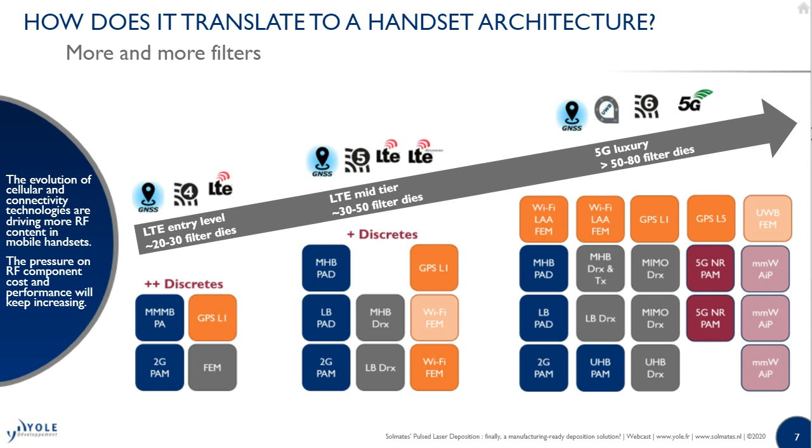And with that, there is a problem of cost performance equation, as there are more and more filters to pack in a handset, but there is less space to pack the filters. A lot of innovation is required to improve the form factor of the filters. Also, the cost of the filters is important. So it leads to innovation in packaging. There is also a big pressure for yield improvement. And there is a trend toward multiple filter aggregation in a single die. Also carrier aggregation pressure that leads to more quadplexers, hexaplexers, and so on, so n-plexers. More complex filters are coming over time.

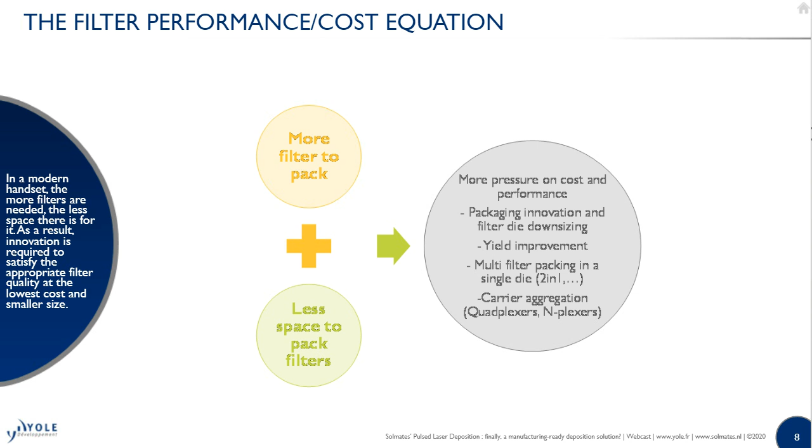To build these filters, there is a variety of technologies that can address the multiple bands of frequency to be addressed, and also the multiple bandwidth requirements. To just name the different technologies, we are talking there acoustic wave technologies. There is the well-known legacy technology, which is SAW, surface acoustic wave technology. On top of that, there is the temperature compensated SAW, which is kind of an improved technology enabling a good behavior when the temperature of the device is changing.

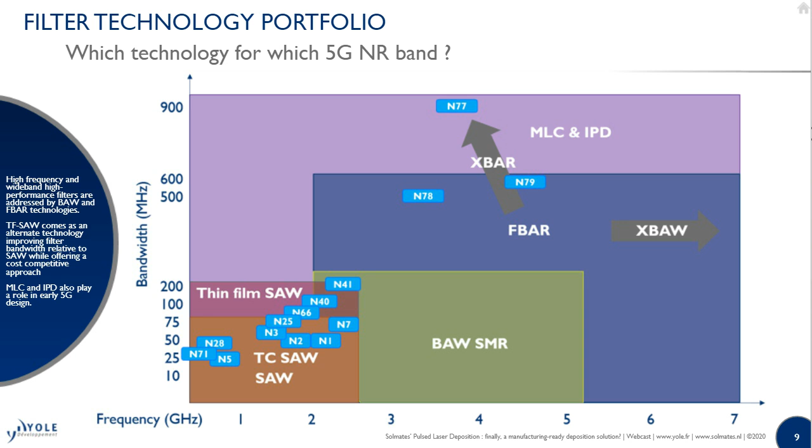There is also a new type of technologies that are emerging, which we call thin film surface acoustic waves. Basic idea is the film of the piezo layer is thin compared to the SAW technology. It's not a bulk acoustic wave. Then after, there is the bulk acoustic wave technology. There are multiple flavors of it. One is the BAW-SMR, solid mounted resonator, and the FBAR technology, which is the membrane built on top of a silicon substrate. And to complement the filter technology portfolio, there is also multi-layer ceramics and IPD type of filters that can address several bands.

Looking at the technology landscape, each technology has players that have developed their own IP and products. And if we go to the high-performance filters, such as the temperature compensated SAW or thin film SAW, also the BAW-SMR and FBAR filters, there is not a big list of players that can play into those type of high-end filters. And it's interesting to see that all of these bricks have been developed by these players to have a complete portfolio of technology and address the multiple needs of the market.

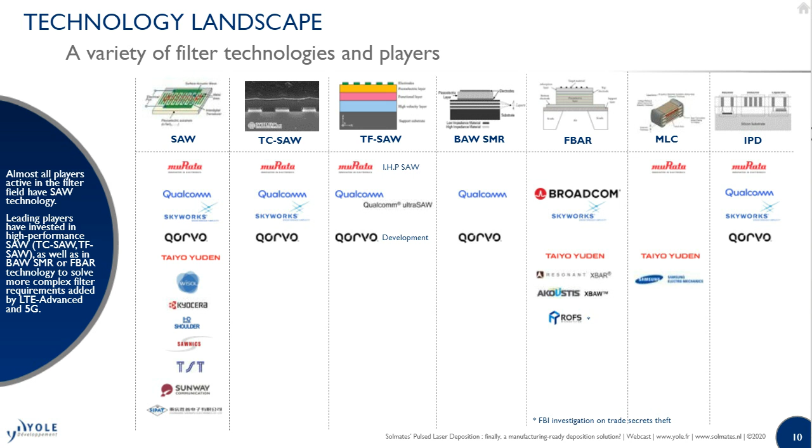Looking at the market size, what does it mean in terms of number of components? So we estimated in 2019, the number of filters were 56 billion units of devices, or number of die, and we expect it to grow more than 4% up to 76 billion units by 2025. Looking at the different technology portfolio and how it is evolving inside, what we see is the high performance filter technology that takes more share into the market. So the BAW-SMR technologies, also the FBAR technology are gaining more traction on the market. And there is also the high-performance TC-SAW and TF-SAW filters that are raising some interest by the industry.

So looking at the wafers needed to support these different technologies, we have multiple types of wafers to support it. So first type of wafers are the lithium tantalate wafers. We converted it to 6-inch equivalent, showing the growth from 2019 to 2025. It's roughly 3% growth of this type of substrate, mainly to support the SAW filters and also the thin-film SAW technologies that penetrate the market. Looking at the other type of substrate that are used for filter technology, you have the lithium niobate, and again, it is given in a 6-inch equivalent.

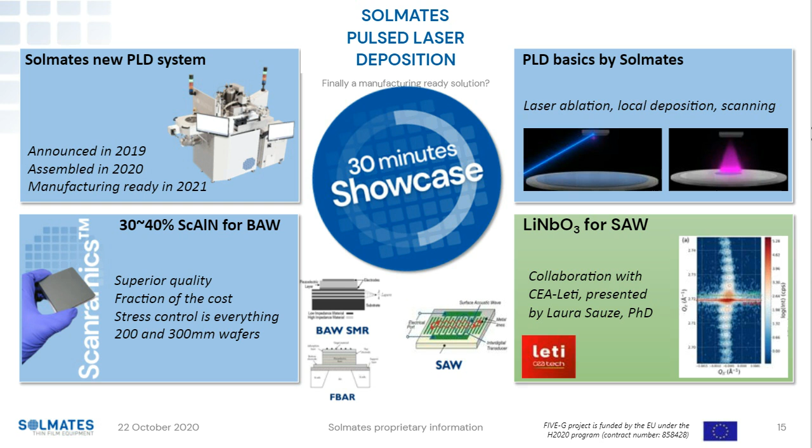And then this webinar, we dedicated it to the RF landscape, so BAW filters and SAW filters. So we will give you 2 showcases. One showcase I will present, it's about highly doped scandium aluminum nitride, and the other one Laura will present. It's early work on our collaboration about lithium niobate for SAW filters. And I think Cedric, in the one before last slide, if you look at the CAGRs, so the growth of these markets, it's both BAW, SMR, and thin film SAW. So we hope that these materials raise interest for people in that field of manufacturing.

All right. So before we go to the animation, Arjen, can you explain a bit? Yeah, thanks, Bart. As I said, we already started in 2006, and I think this picture shows that of Martijn Dekkers, one of the founders, in his early days. And if you look closely at the machines that we have developed and are in the market, then you see that almost every 2 years we were able to produce an improved platform, not only improving the uniformity, but also the particle levels with improved droplet trap filters, which will be discussed later on.

And I have to be honest, I think today, when we already have shipped and installed a few of the last systems here on the slide, it brings everything together. This is the tool that we have developed in order to adapt to the customer needs. It's a tool that is cluster compatible. It brings all the knowledge we have into this beautiful piece of equipment. And that's why we are here today to say more about it.

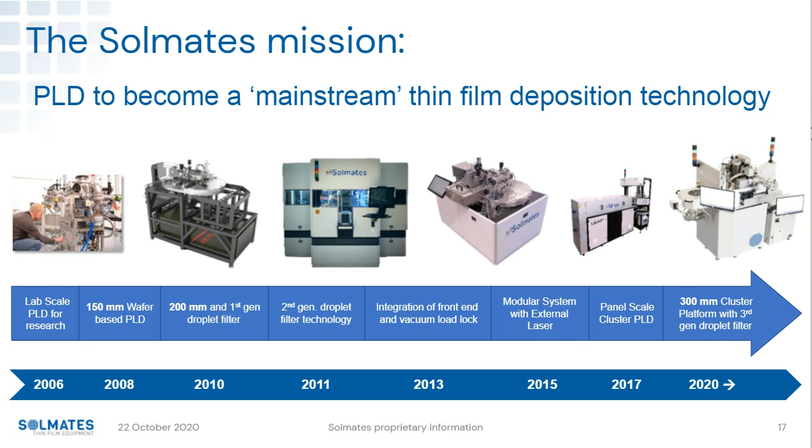All right. So, Arjen, you stole my thunder. So here it is, cluster compatible, wafer sizes up to 300 millimeters. So this is a picture which has a single wafer load lock, but this same system equally simply mounts to all major handlers.

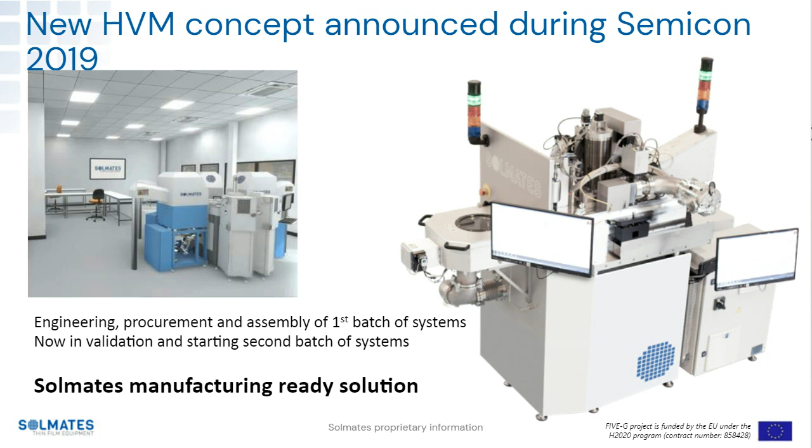So I'm very eager. I like hardware. I can talk about hardware for another hour. So if you want to know more about the design concepts of this system, please contact us, and we can talk you through all the neat features of this equipment.

But what we really want to show you is a bit of an introduction into PLD, into the basics. And quite often we use our hands and we make gestures trying to envision how it works. So what we did is we made a video clip to show it. So what you see in this video is our... I hope it runs. Yes, here it goes. So it's a pulse laser. It's a very powerful pulse laser.

You can see that the target that we're using, so the source material, is relatively small compared to the wafer. So here's this little zoom in. So it's a square target. We are ablating material and we are creating this plasma plume. There is no argon, not an argon plasma. We don't need to keep a current going. So all the energy of the plasma plume comes from the laser, right? So there is some background gas to control pressure, but the laser is what makes the plasma.

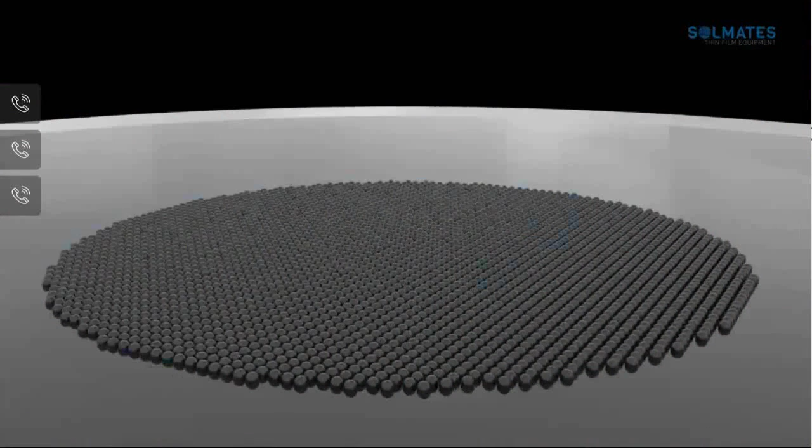It takes a couple of pulses only to make a monolayer. It's a local monolayer on the wafer. We need to fill the entire wafer, of course. But this plasma has excited species, and by scanning the wafer versus the target, you can see that we can build up an entire layer. So this was a less than 1 minute introduction into the PLD basics. There's much more to it. Maybe, Arjen, can you summarize for us?

No, I think in the beginning I said why we are on this mission is because we believe and see that this technology is different. And if you look at the stills from the video, but also at the physics behind it, you can see that the main difference with sputtering, which is what we are compared to the most, is the density of species in the plasma. That's more than 5 orders higher than in sputtering. And of course, the plasma is very local. It's about the size of an apple, but the density is very, very large.

In combination with the high excitation energy of these species, this results in a very dense cloud of a supersaturated plasma. And this supersaturation allows for easy nucleation and easy formation of materials, even very complex materials. And not only that, it also allows us to transfer stoichiometric complex materials one-on-one from the target to the substrate. And I think a very interesting part of this is this local nature that allows us to give local control on the thin film properties across the wafer. And I think this is a unique part in the semiconductor market.

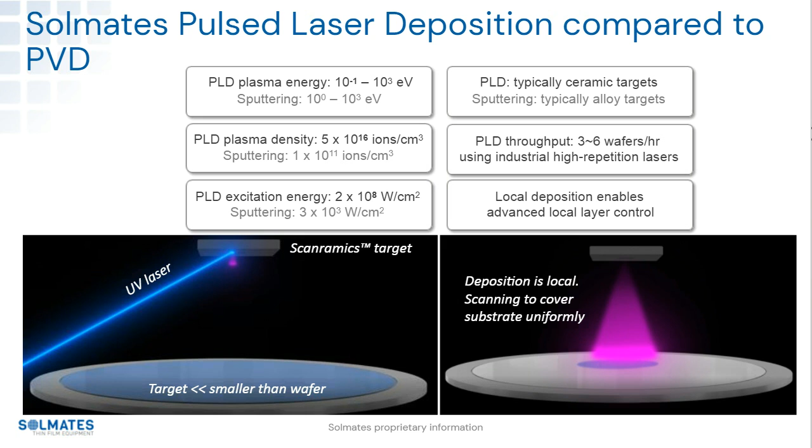But first, there's another topic we need to talk about, and it's an important topic. I already mentioned a bit of it, and it's particles. How about particles? Many people that know about PLD say it's great. You can make fantastic material systems with PLD. But how about the particles? Well, a lot of Solmates technology is about particles, making sure that the particles are filtered out. You could already see it in the slide that Arjen presented. We're now on the 3rd generation of our particle filtration technology.

And the other part of it is, of course, making sure particles aren't formed. So it's a combination of both. Having control over the ablation process, making sure that we minimize the amount of particles being formed. But the other part is key technology. It's the key of what sets Solmates apart from others, the ability to filter particles.

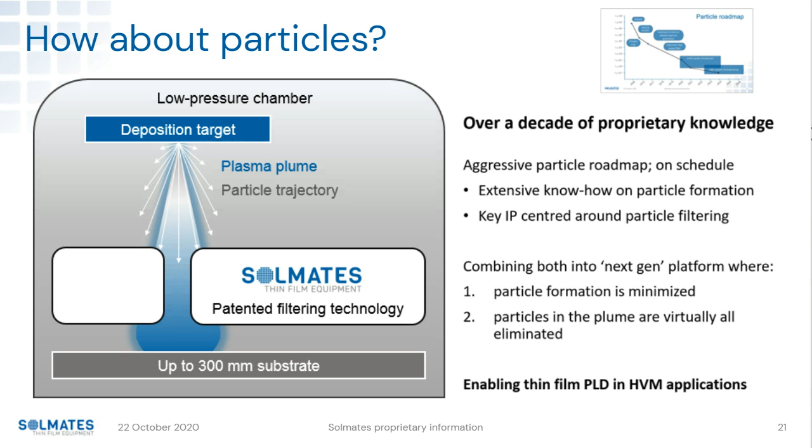But let's move to the showcases. So we will do one showcase, scandium doped aluminium nitride, for BAW filters, and then in a couple of slides from now, we will have Laura present the update on lithium niobate.

So if we talk about scandium doped aluminium nitride, we chose this webinar to focus on the RF application, but this material is much in need for other applications as well, for the sensor people, PMUTs, microphones, speakers, and many more. But if we talk to filter customers, this is what they say in terms of manufacturing needs.

So it's coupling factor, right? Scandium doping increases your coupling factor. You never have high enough coupling factor. And of course, coupling factor is also very much device dependent. So if we do our 30% scandium optimization, that's the core of our focus, then we can, from the material properties, derive the theoretical value of a coupling factor of 17. So clearly, it's in the upper range of performance.

Coupling factor is important, but the other thing that's really important is uniformity in coupling factor. This is well known. Stress in the layer and coupling factor are related. So therefore, what we need to do as an equipment supplier is make sure that we have uniformity in stress. There is never enough uniformity in stress. This is directly linked to yield.

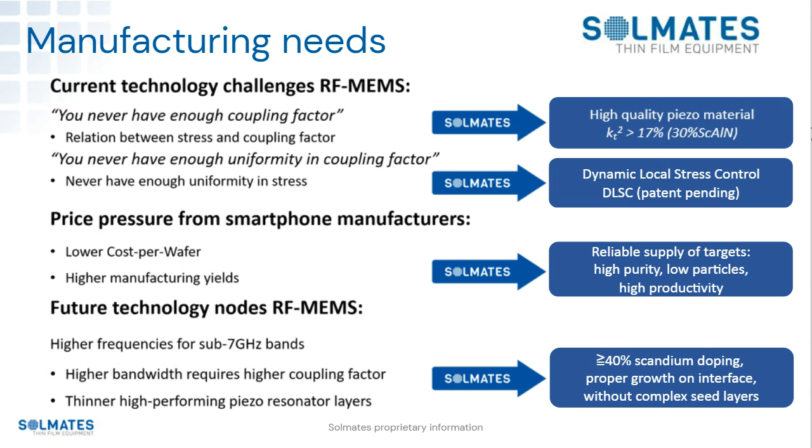So in the future technology, with the higher frequency bands in the sub-7 range, the resonance frequencies go up. So the layers become thinner. And as the layers become thinner, you need really good quality material, but also, in terms of optimizing the coupling factor, you need even higher scandium doping. So we will show you one slide, the proof in the pudding. We did also some work on 40%. It works well, so hang in there.

So first the basics. This is for 30% scandium doped aluminium nitride. We want to show you some basic performance numbers. So there's a good e31,f. The tunable stress range, we can go from compressive to tensile over a large range. Stress uniformity, 50 megapascals. And this is an important number because this is full range, right? So this is maximum minus minimum. Some people report half range, but we report full range.

Thickness uniformity, everybody knows it needs to be uniform because the thickness is the resonance frequency, and otherwise you head into cumbersome trimming. Rocking curves are good. Surface roughness, it's pretty smooth, as you can also see from the cross-section. Crystal pyramids, also called abnormal outgrowth, very important factor. We can do that. We can control the stress also for 40% and have means and ways to minimize the crystal outgrowth. So we claim pyramid-free deposition.

Particle impact on yield, yes, there are particles, but from the demos, from the work that we did, we get positive feedback, very little impact on yield. And of course, this is an easy claim to make from our side, but if you want to assess this for your manufacturing needs, then that's a topic that needs attention. That's a topic, of course, that you want to determine for yourself. But we felt a lot of encouragement from these results.

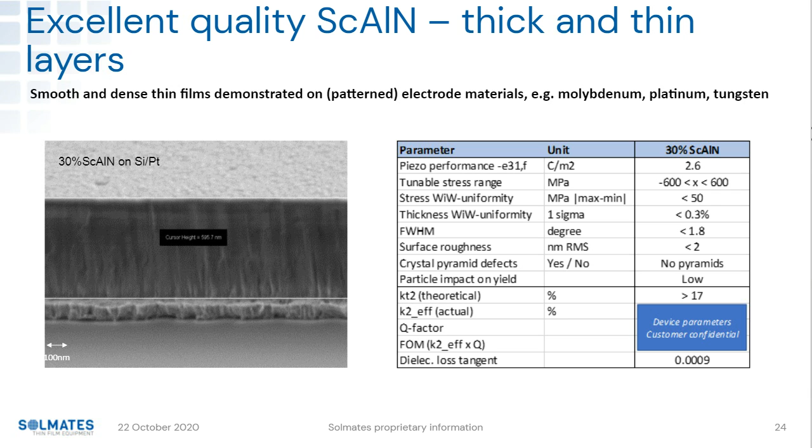It's fundamentally good material. Also, the initial growth from the electrode, it grows relatively well right away. No complex seed layers necessary. It's a good material. So stress control, we already mentioned it. In RF filter manufacturing and BAW filter manufacturing, stress control is very important.

So we have a local deposition. That's what we showed in the animation. And it means that we can also locally make variations. We can locally control the deposition. We can locally control the stress.

So either we go for best-in-class uniformity, and that means that we can go to 50 megapascals. We think we can do even better. At the moment, we're hitting the limits of the metrology tool. So the metrology is limiting progress here. But we think we can do way better than 50 megapascals.

But even one step further, sometimes in device integration it's desirable to intentionally induce a non-uniformity. If that helps with a filter stack, with a device stack, if multiple layers stack to each other, we need to compensate for non-uniformities in another layer, then we'll take up that challenge.

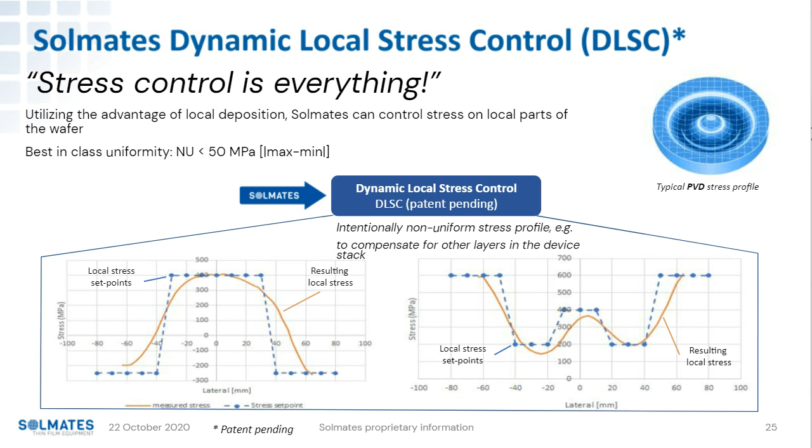And the two graphs here, they're pretty extreme. It's a large variation in stress, but it's flexing our muscles a bit. But if we need to flip the profile around, then I hope these graphs illustrate that we can do that. Reiterating, it's seizing the advantage of the local nature of pulsed laser deposition. All right. So quick slide. The piezo performance is maintained, so even over a wide range.

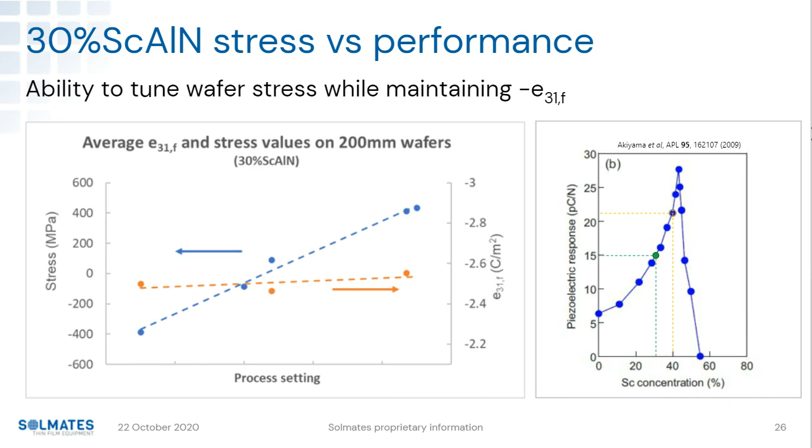So let's talk about targets, because scandium-doped aluminium and targets, that's the topic. I think the people that do scandium-doped aluminium with PVD, they know that highly doped scandium targets, especially low oxygen, well, that can be a problem. They're very expensive, and it can even be problematic to get your hands on it. Well, Solmates has the solution.

So we've developed our own ceramic target. And the word ceramic here is important. It's not an alloy, right? What we do is we have a scandium-doped aluminium nitride. The nitride's in there. It's a ceramic target, and we do a stoichiometric transfer. So the source material, we transfer it to the wafer. It's the same. And therefore, it's fundamentally different.

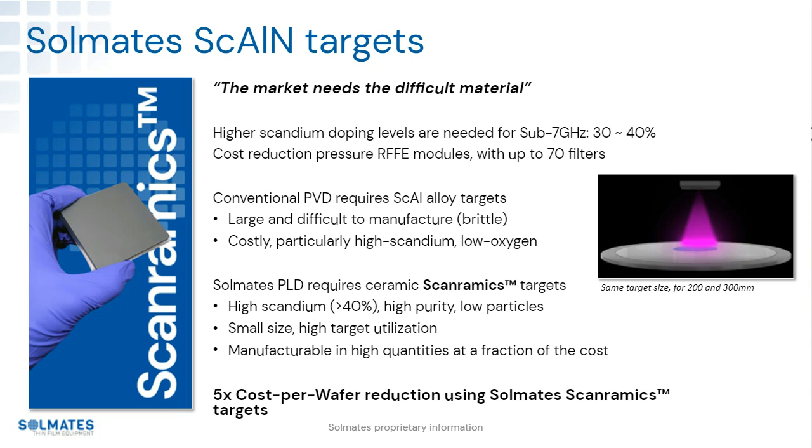And it's low cost. It's small size. The same size can do 200 and 300 millimeter at high productivity. And there is no problem to get to 40%. Well, and why not a little above, right? Thinner layers, like I said, for higher frequencies are also important.

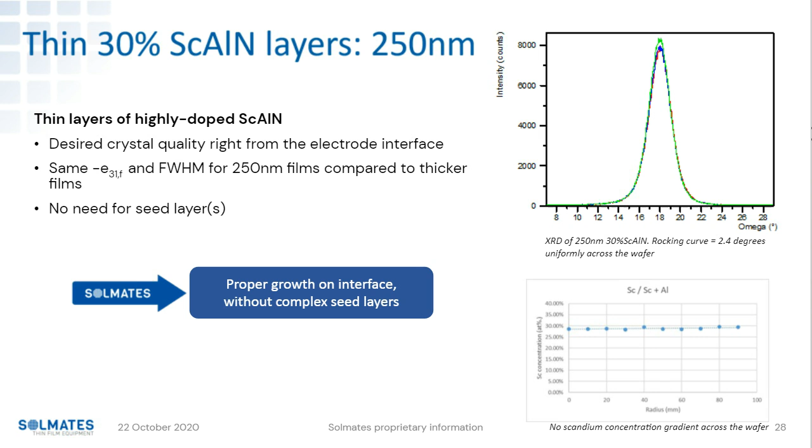The graph in the bottom right illustrates another issue that we don't have, and that's scandium gradients over the wafer. Like I said, it's stoichiometric transfer. So the scandium concentration is the same all over the wafer. So that's nothing to worry about either.

Proof in the pudding. We focused our core research on 30% scandium. But we also just put in a 40% target. I mean, we've said to people, there's no reason why we couldn't do 40. So we decided to put it in there, and it works really well. It's just a couple of weeks' work.

So what we can do with 40% is vary stress, same way we did it for 30%. But the people that work with us will know that it becomes increasingly difficult to suppress, to avoid pyramids. So we managed to do it in a couple of weeks. We grow 40% scandium layer, pyramid-free. We can even do tensile.

All right. Summing it up, we're saying we have a manufacturing-ready solution. In a way, our proposition is easy, right? Our proposition is superior quality at a fraction of the cost. And this is what we demonstrate. So we're currently in the phase to prove this exciting technology in a manufacturing environment with launching customers.

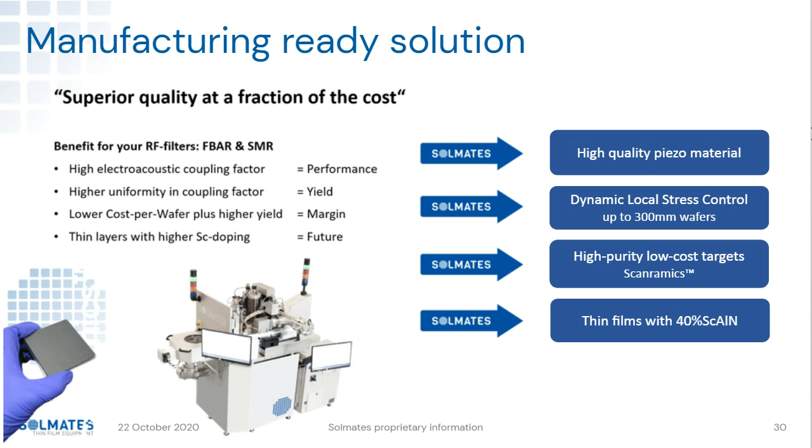So besides aluminum nitride for BAW filters, we have another exciting PLD application for SAW filters. So welcome again, Laura. So thanks for joining. Can you update all of us on your latest findings?

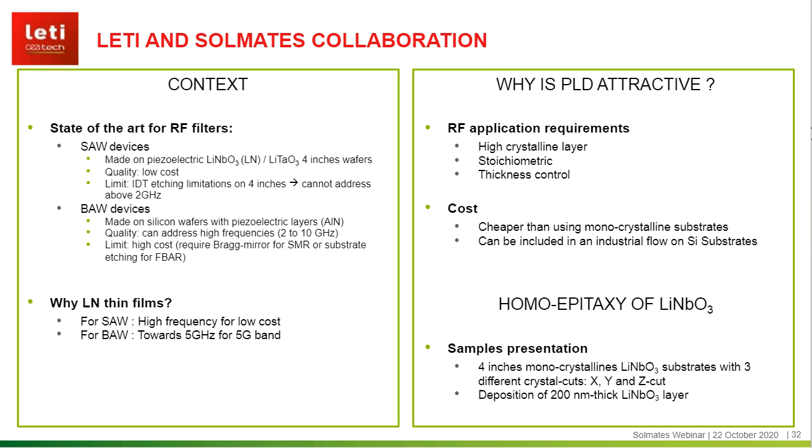This is why we have decided to collaborate with Solmates on the subject and try to perform a homoepitaxy of lithium niobate. This time we used lithium niobate substrates of different crystal cuts and deposited a 200 nanometer thick lithium niobate layer. We wanted to test first the quality of the process before further experiments. And the results are promising.

The crystalline quality of the layers is excellent. Diffraction analysis indicates that we have narrow rocking curves for all the layers: regardless of the crystal cut, we have low values of full width at half maximum. Thus, the crystalline structure of the layer is similar to the substrate for all the samples. We tested the X cut, a Y cut, and moreover, transmission electron microscopy analysis points out that we have a defect-free interface between the substrate and the layer, as illustrated here with a Z-cut sample.

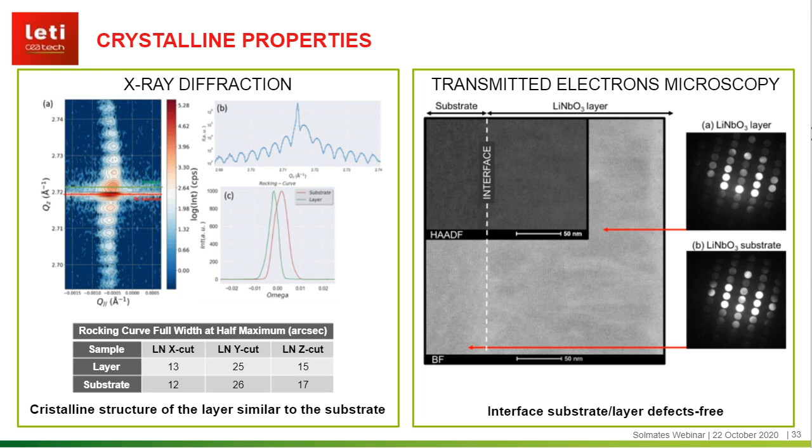Our concerns are a bit more about the roughness and the droplets that could have resulted from the deposition. However, as the AFM images show, we had a low rate of droplets and roughness values close to other classic PVD techniques. And finally, Raman spectroscopy analysis compared the bulk substrate and the substrate plus the layer by PLD. These analyses confirm all the previous results, such as the samples have a low roughness, low defects, and a stoichiometry close to it.

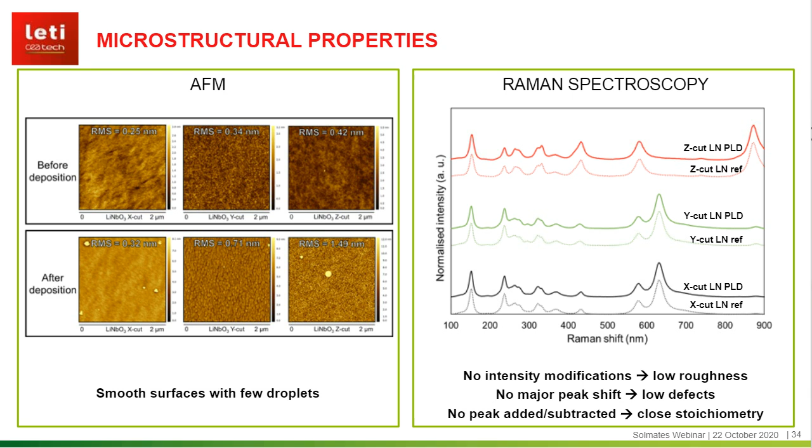From our point of view, PLD seems to have a bright future for radiofrequency device applications. For SAW technology, it will help reduce the production cost by enabling a process on silicon substrates, but also reduce the production time and maybe even be developed for large substrate sizes. Moreover, external underlayers could be used under the piezoelectric layer. And finally, the thickness of the piezo layer can be controlled, which is also an interesting feature for BAW technology.

BAW technology could also be very interested in pulsed laser deposition techniques. It could address high frequency as well as reduce the cost of production, for instance, by making the entire stack of the bottom electrode, the piezo, and the top electrode inside the same equipment.

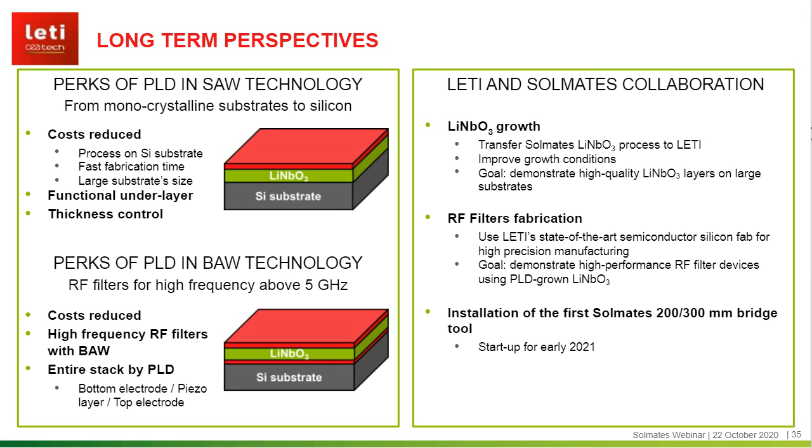As for the Leti and Solmates collaboration, on one hand, the deposition process of lithium niobate thin film will be transferred, and we will try to optimize it to be able to demonstrate the process on various and large substrates. And on the other hand, Leti will use its competencies in silicon fabrication to demonstrate the high frequencies that can be reached with radio frequency filters in lithium niobate thin film grown by PLD. All this will be with the installation of the first 200 millimeter bridge tool of Solmates that will operate at the beginning of 2021 at Leti.

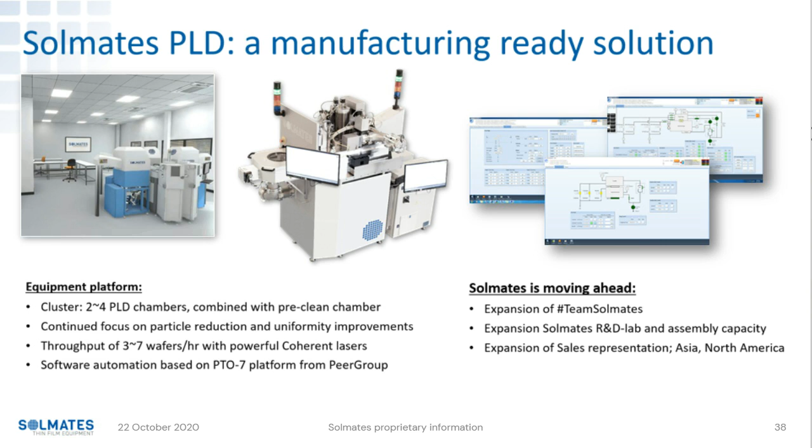So, Arjen. Yes, I think we're almost at the end of this webinar, and we hope we were able to show you what the potential is, and also what Solmates PLD can offer to you. I'm pretty sure by now that you also see why we are so enthusiastic about what we're doing. As said in the beginning, the Solmates PLD train is on the move, and we just invite you to jump on board and work with us towards integrating this technology into your chipsets, into your fab. We understand and we recognize that delivering quality is very hard. It's hard work for all parties, and that's why we believe in teamwork.

David, back to you. Thank you very much for all this relevant and interesting analysis. We are now going to wrap up and finally get the Q&A session. So we'll answer as many questions as time allows us today. And we'll begin with a few questions for Solmates.

So the first question is, what control do you have over substrate temperature during deposition? And what temperature can customers select? So it's a good question, because for scandium-doped aluminium nitride and epitaxial growth, those are different temperature ranges. So we use a heated chuck, and the aim is to go up to 750, maybe 800 degrees, and that's more than enough, at least for scandium-doped aluminium nitride. So it's a wide range of temperatures that can be selected. And as Bart says, it's on the high side for also other materials that you want to do, but lower temperatures are of course also possible.